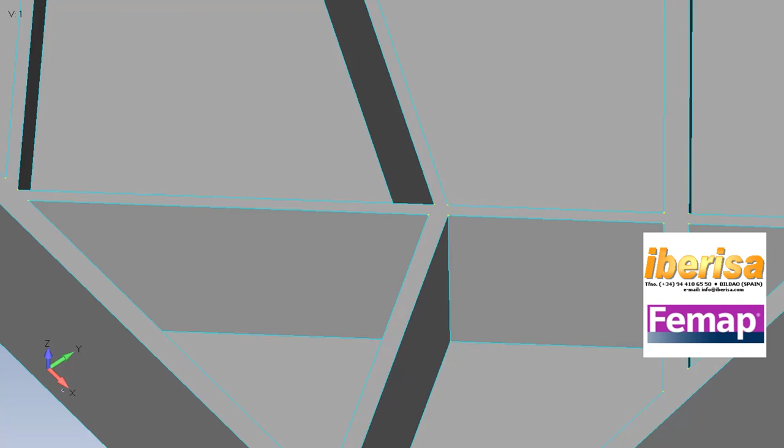In FEMAP 2020.1, there's a new option in mid-surface automatic called overlap repair. This option will help clean up mid-surfaces in areas where ribs come together.

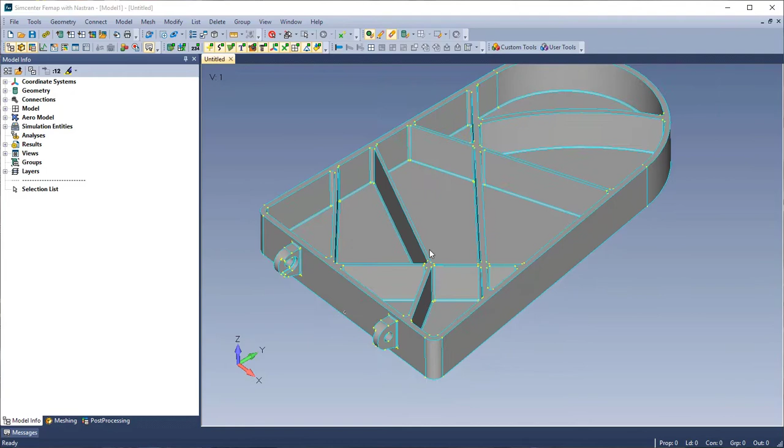So I'm going to go ahead and get started on mid-surfacing my part. I'm going to start with removing the blends. If you remember from the last release of FEMAP, we added the preview option. So I'm just going to set the limit size to 0.125 and then go ahead and remove a couple of the blends so I can keep the rounded edges on my part here.

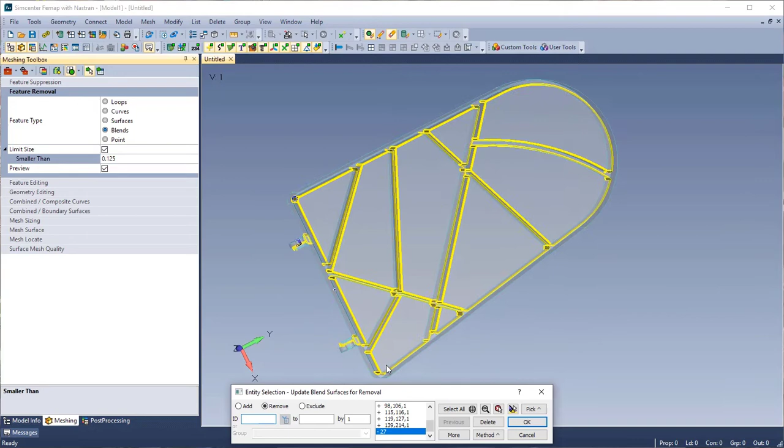I think I have everything selected here, so I'm going to follow through with the command. Okay, I've cleaned up my geometry, so now I can use geometry mid-surface automatic. I'm going to select all and do a target thickness of 0.25.

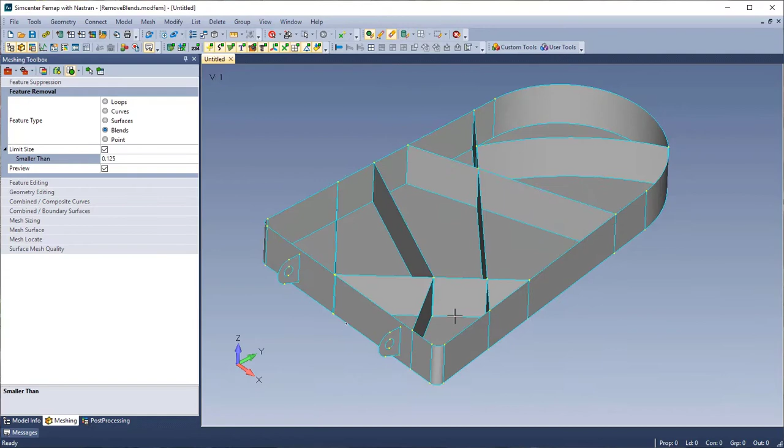At the bottom of the dialog, you'll see the overlap repair option. I'm going to leave this off for now. Okay, so I created my mid-surface, and now I'm going to use the draw erase tool to hide the solids so I can look at my mid-surfaces. You'll notice in the area where there was a couple ribs coming into each other that two of the ribs actually had different thicknesses.

Therefore when the mid-surfaces were created, the surfaces weren't perfectly aligned. So you'll notice that when I'm selecting the surfaces, there's a small rectangular area in the middle where the two surfaces are overlapping each other.

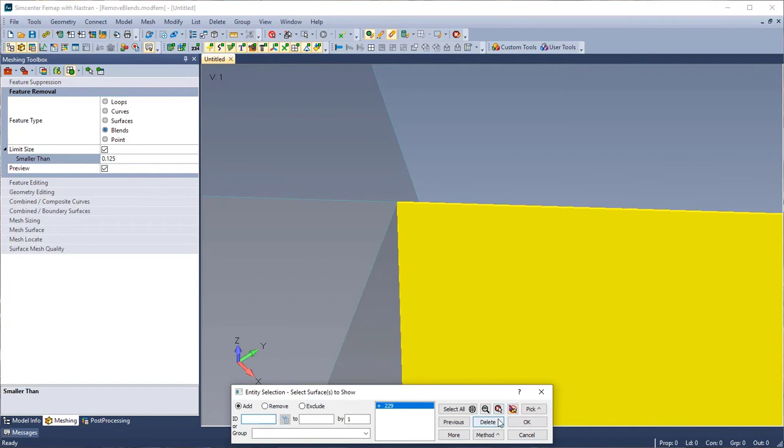So I'm going to go ahead and undo a couple times and get back to the state where I just had my solid part and no mid-surfaces. So I'm back to just my solid part here, and I'm going to go ahead and use mid-surface automatic again. Select all and use the same target thickness of 0.25.

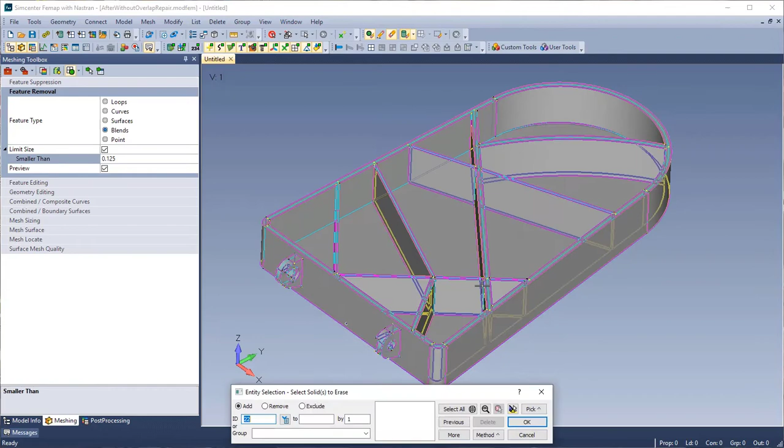And now I'm going to use overlap repair. I've got the mid-surface, and I'm going to use the draw erase tool again to hide the solid. Now I can compare the mid-surfaces after using overlap repair.

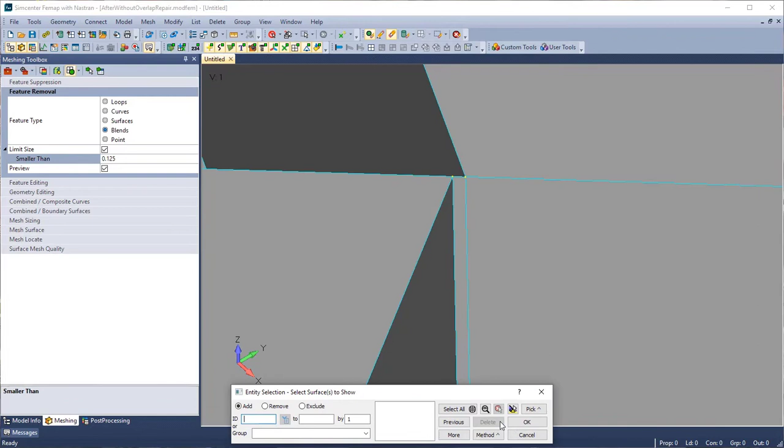So you'll notice that when I'm selecting these surfaces, that the edge of both surfaces are actually coincident, and there is no overlap between them. So this can save time on additional steps of geometry cleanup, and as an option, at times, it can create a cleaner mid-surface.

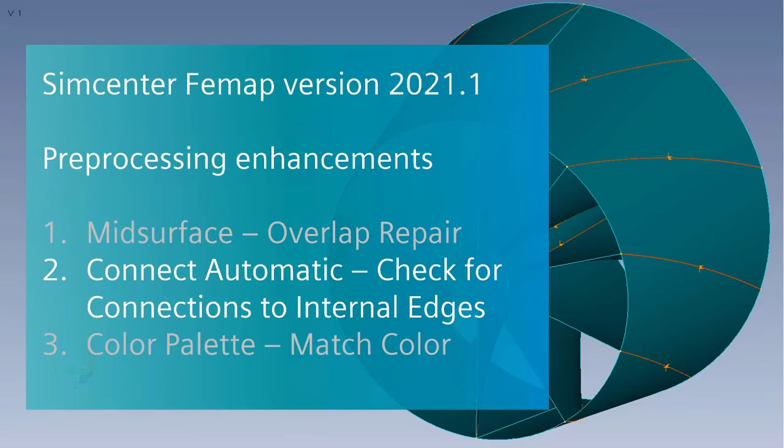In FEMAP 2021.1, there's a new option in Connect Automatic that will allow users to check for connections on internal edges. Before I use Connect Automatic, I'm going to show the steps required to burn in the edges along the inner and outer surfaces. As you can see, when I show only the inner and outer cylindrical surfaces, there are no internal edges on them from the fan blade-like surfaces.

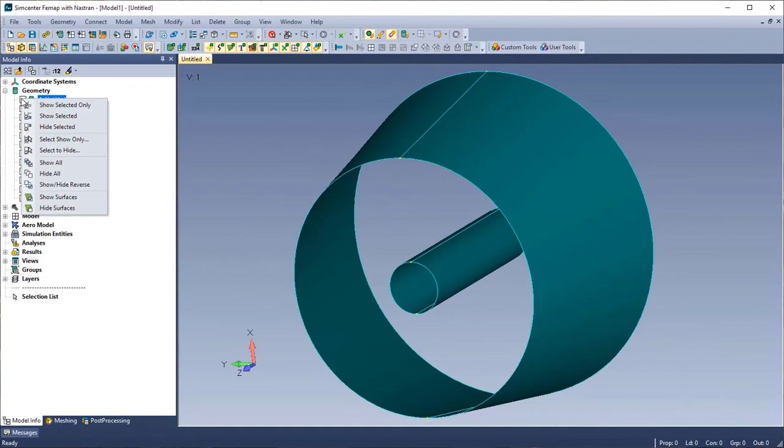So I'm going to go ahead and show all surfaces again, and then I'm going to use the command geometry mid-surface intersect. Select all my surfaces. And then you'll notice when I show only the inner and outer cylindrical surfaces that those now have internal edges from those fan blade-like surfaces.

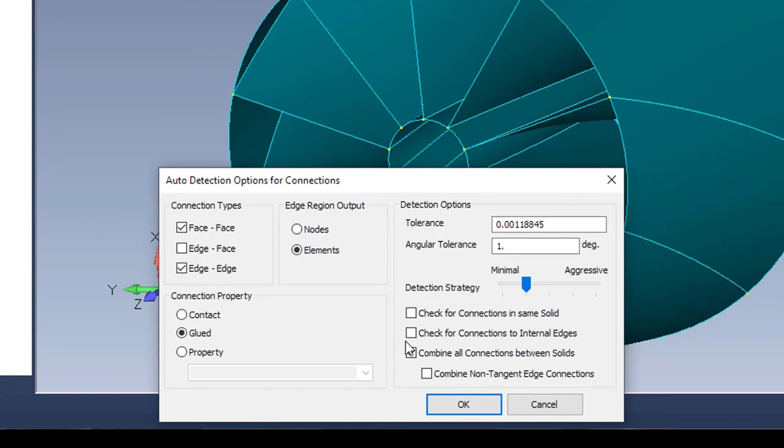And now I'm ready to create my connections. So I'm going to do this all in one shot and use Connect Automatic. Select all my surfaces, and then I want to turn on edge to edge, and then my new option becomes available: check for connections to internal edges.

So my connections are all created now, and these are all glued connectors. I can expand my model info tree and show some of these. You'll see there on the edges where those internal edges were created from the mid-surface intersection.

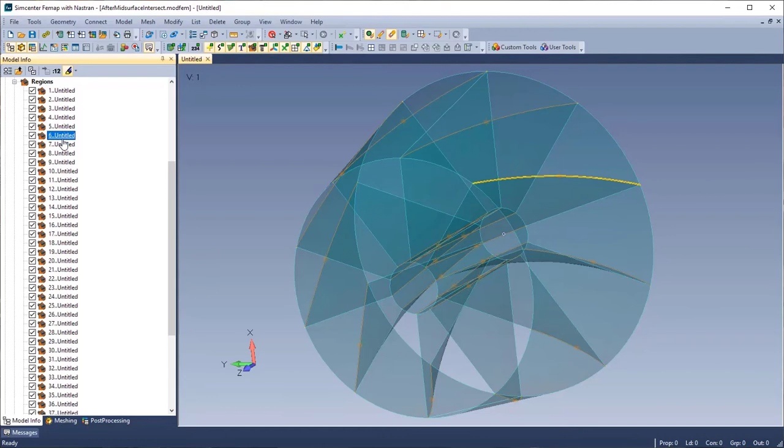Now I can edit these, and you'll see that they're defined on the curves, so they'll automatically propagate to the mesh. So I'm just going to skip forward here to my finished model. You'll notice where those connectors were, the mesh does not line up. So these are glued connectors.

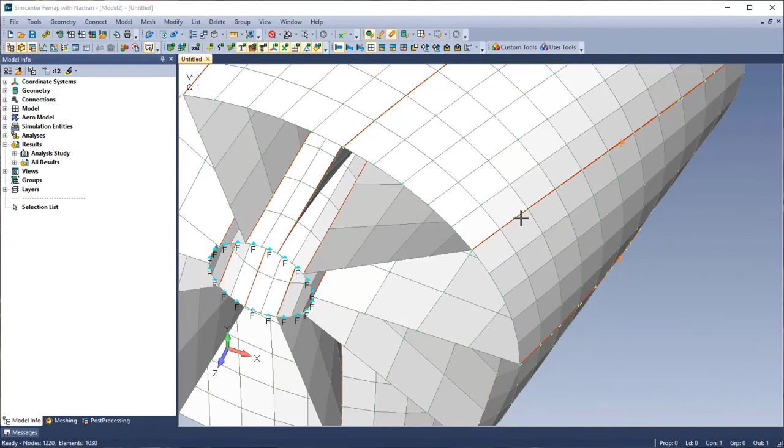And this model has already been solved. So I'm going to go ahead and turn off connectors and connection regions and just show some of the mode shapes.

New in FEMAP 2021.1 is the ability to match colors using selected entities. In my model here, the elements are currently colored by their property, and the diagonal tubes are too close in color to the shells.

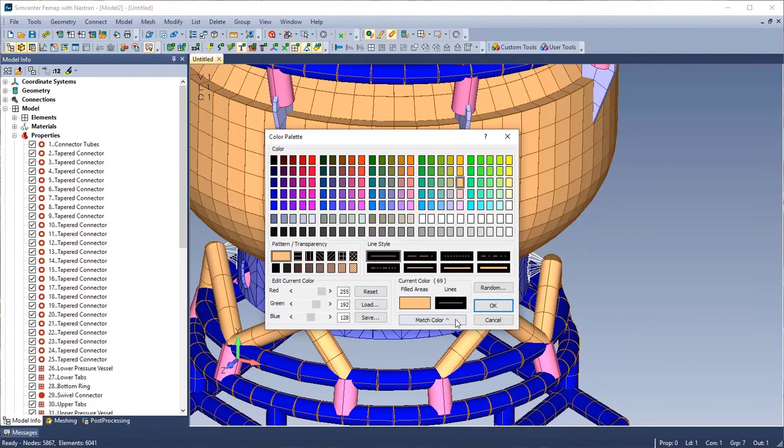So I am going to use the command modify color property and select the property of my diagonal tube, and using the match color with the entity type of property, I'm going to select the property of my other tubes.

So in this model here, I've imported my geometry, and you'll notice that all of the solids have different colors. So pretty much repeating the same steps as I did before, although this time I'm going to use match color by solid and select the one bushing so I can get all three of the bushings to match colors.

And now I'm going to go ahead and repeat that step 2 more times so I can get the colors of the washers to match along with the colors of the bolts to match.